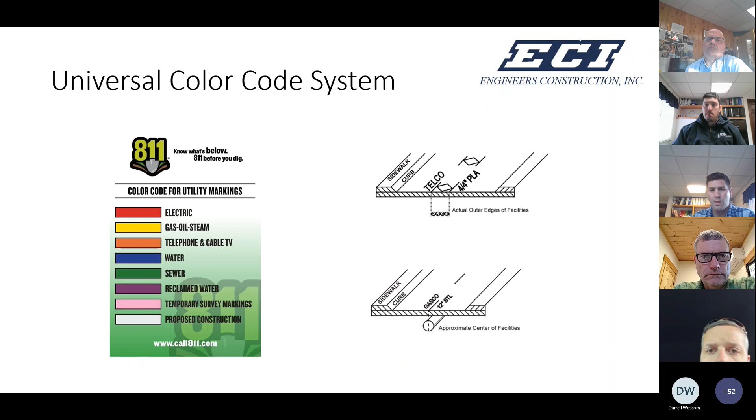Lastly, it's the law for us to maintain our marks, something we sometimes lapse on a bit. So let's make sure that if we're going to remove any marks or pavement, we have a plan. If it's creating offsets with grade stakes, taking photos, but also calling the surveyors to GPS and come back to establish those marks. Once we remove a mark and can't maintain it, we're flying blind, putting ourselves at risk for a utility strike.

Easiest thing to do is grab a tape, create some offsets, put it in your field book, so we can always go back and refresh those marks as the project progresses, especially on long longitudinal projects, waterline projects, with a lot of different crossings. So let's just make sure we have a plan, and that plan is established.

Hey Matt, I got a question. At what point are we not required by law to maintain the marks? What if we've done the excavation, maintained the marks, and we're backfilling but still on the project? Do we have to keep maintaining those marks beyond that point, or is that when we're going to be a problem? What does the law say about maintaining the marks?

For excavation, when we're digging down to do our work, as soon as we're bringing our work back up to finish grade and doing all our hardscape, we don't need to maintain them because we're not going back. But if we're doing a bunch of dig-downs everywhere, we need to maintain those marks. It's our fault if we damage an underground utility, remove the mark, and then say it wasn't marked - it was marked and we didn't maintain it. That's where we get in trouble. It really comes into effect more if we hit something after we've removed the mark. Exactly, that's what I'd say.

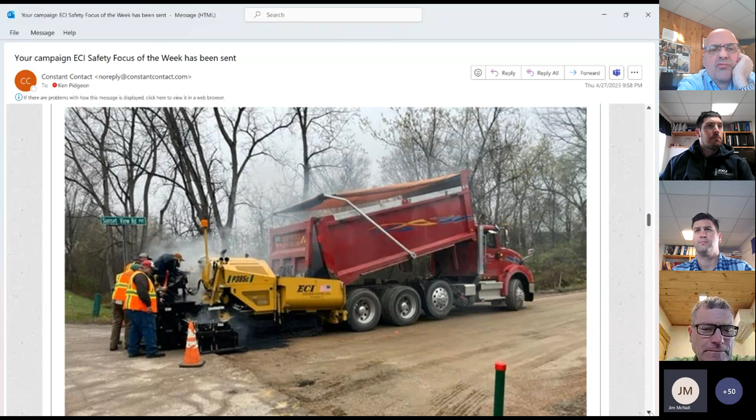Electrically heated screeds. Good, okay, good. Well, that's great.

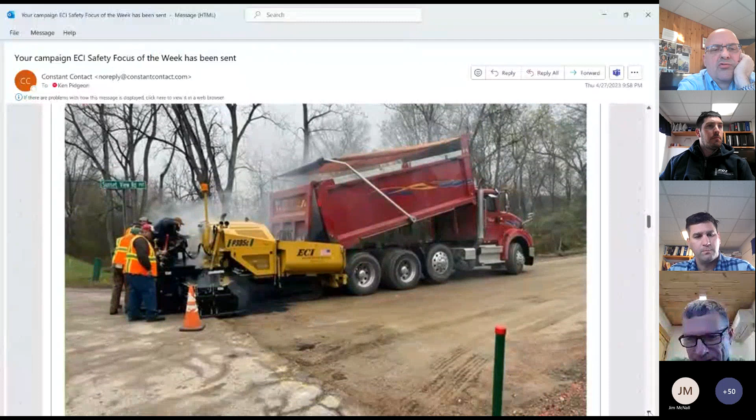And there's a picture from the back end. So that guy on the phone, he's the sales guy. Yeah, Josh, the guy without the vest.

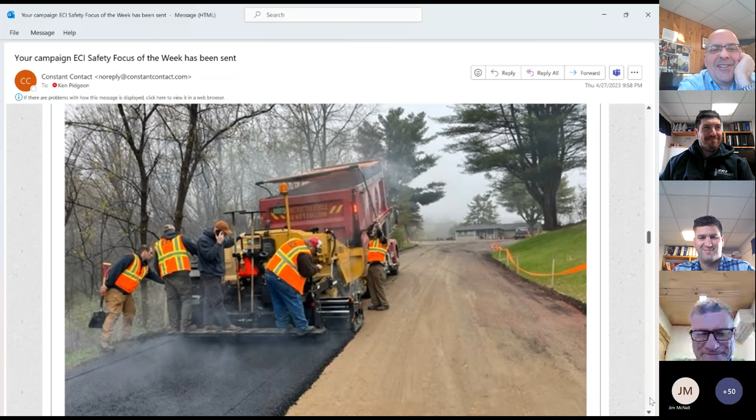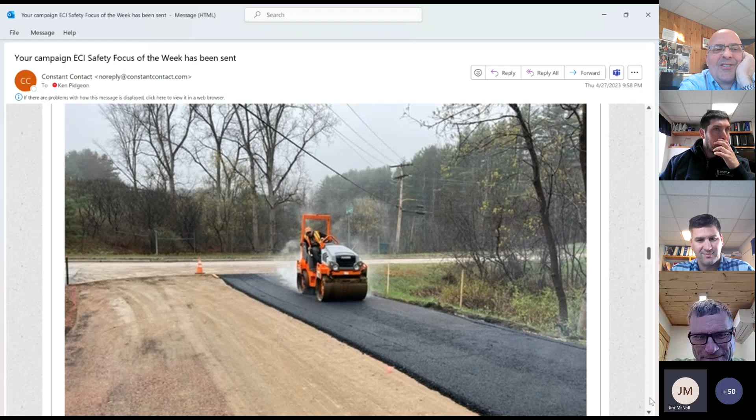It's always awesome running when you get new equipment, isn't it? It's fun. And we had some compaction on that first piece there. Good.

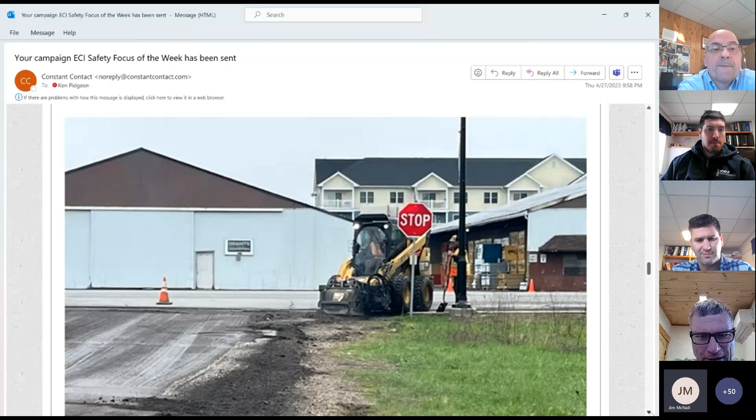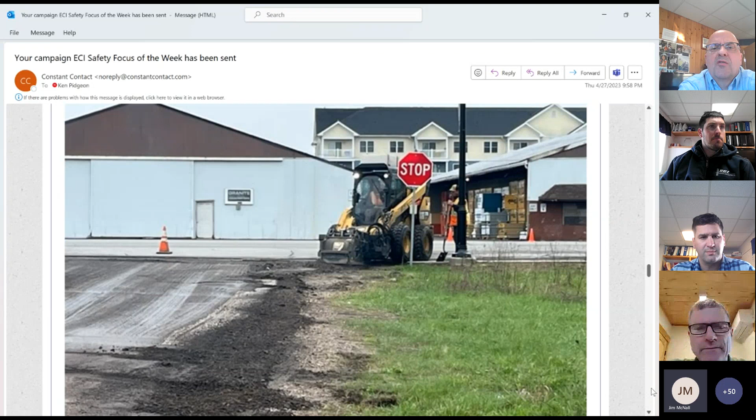Oh, okay, yeah, that's the opposite side of the road, that's Route 7. Haydenberry. McDonald's is right there on the left-hand side. You can't see, okay. Yeah, there you go, McDonald's will be on the right-hand side, I think. Oh wow, heads down in there.

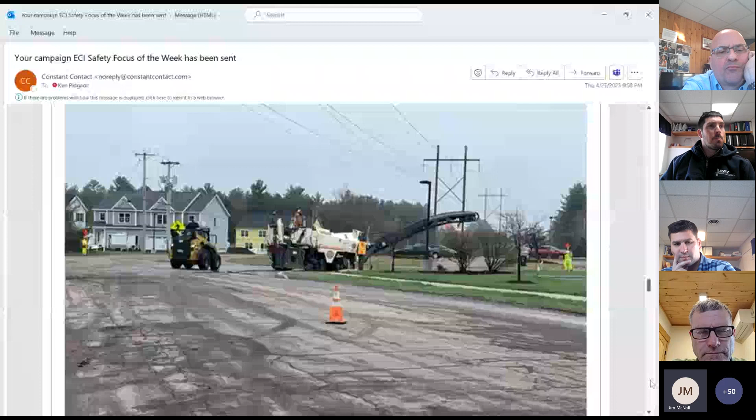That's our skid steer too? Oh yeah, so we were doing, we had some full width. One street was full width, and then a whole bunch of these 25 and 50 foot butt joints or tapers, so they can match into the overlays, not just little trimmer joints. They spec out these 25 and 50-foot tapers, so they're nice smooth transitions.

So we were doing everything, and they're trucking, or? They trucked exactly, they trucked, we did everything else. We did all the milling, trimming, with one truck, and then they subsidized us with additional trucks as needed, pretty much.

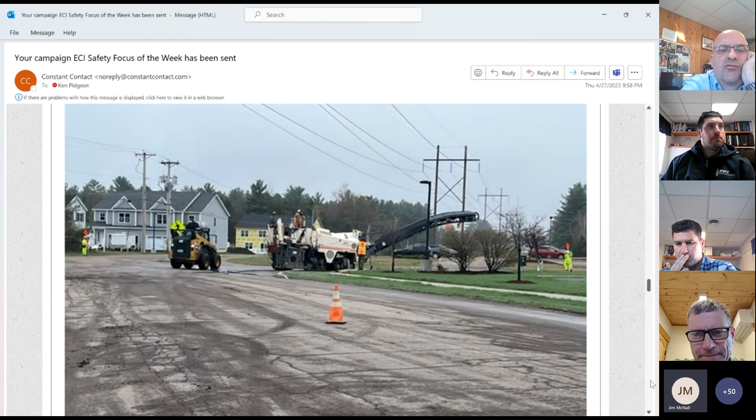Of course, a big part of milling is cleaning it up, right? For sure. Really looks like they need it, they need the pavement. Yeah, look at the existing. Yeah, so you can see like probably a 50-foot butt joint behind them, transition out onto Route 7, so you got a nice smooth finish.

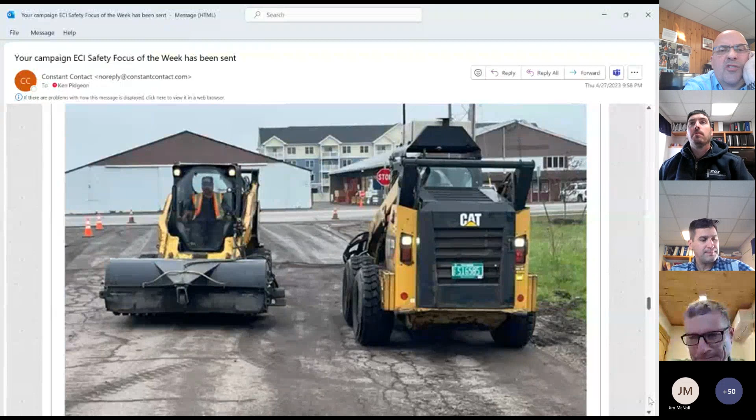These were a little fuzzier, so I kept them small. Who took them up at Lone Pine? That's the little store and check-in building, doing some fine grading prep, getting ready for that base paving that you just showed earlier.

And wrap up that job for the most part, little topsoil, seed, and mulch. The paving guys, the crew, always gets credit for such a nice looking job after it's done, but the prep has a lot to do with it, doesn't it? That is for sure, everybody like Ben and Fix and a lot of the other guys do a lot of the other stuff.

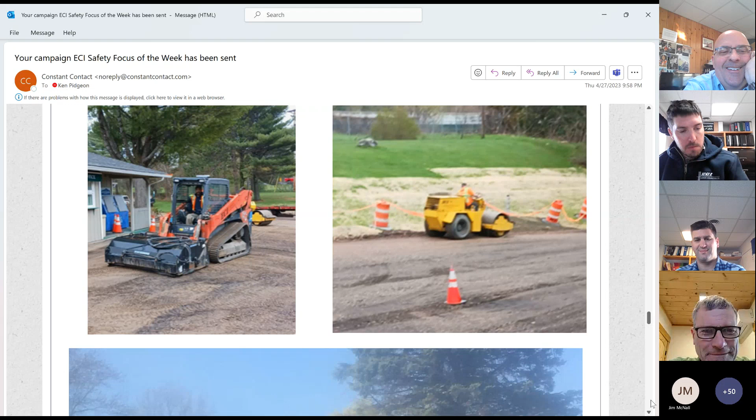It's a little hazy for some reason, but we're putting in that new equipment, asphalt, curb. How old is that roller? The back picture, the old one we call it - I forget the nickname for it. The duo pack roller, the duo pack.

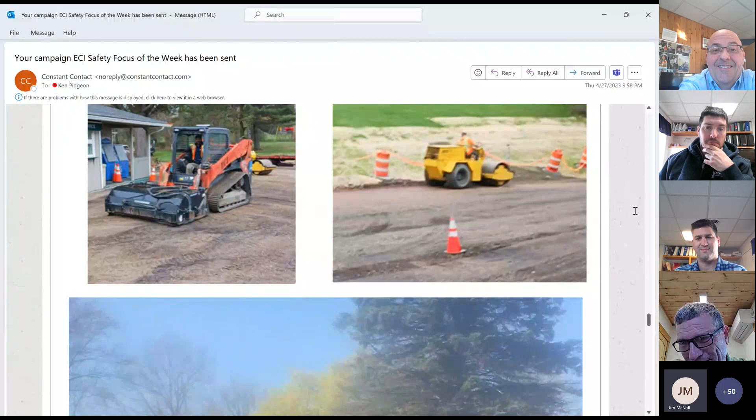That had to be here when you got here. Yeah, I think we have a picture of Ben on that. I'll dig it up next time. Still one of the better rollers - it pounds. It's funny because some of these just self-destruct, but this one's held together.

So the asphalt curbing - yeah, got some curbing going in. And this is the tilt bucket. Yes, they use a whole bunch of - the dump tilt bucket works great for curbing. If you had a little bit of shoulder work to do, you could use it for that. Probably makes a nice wheelbarrow too.

It'll work great for backing up that curb when somebody decides to go over and do it. You can fill the bucket with topsoil or whatever, if it's decent and dry.

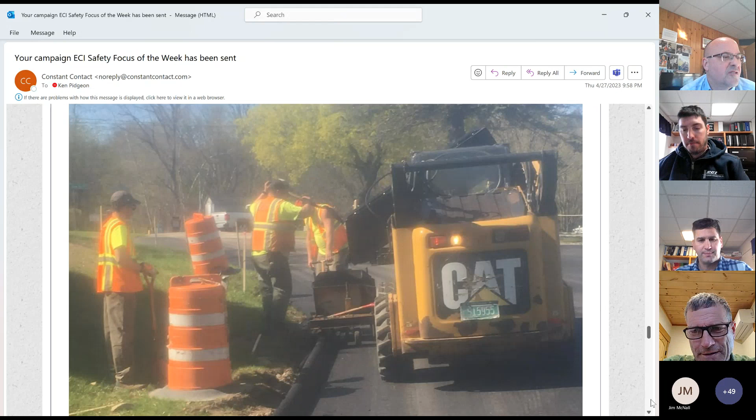Okay, and then this was up on 207. What town is this actually? It's actually in Swanton, right Mark? Just over the line. The Swanton line, when you get off exit - second St. Albans is only about a mile up, 2 miles. You're in Swanton heading towards Highgate. It's called Swanton Street Culvert, and I was like, well does that mean it's not Swanton?

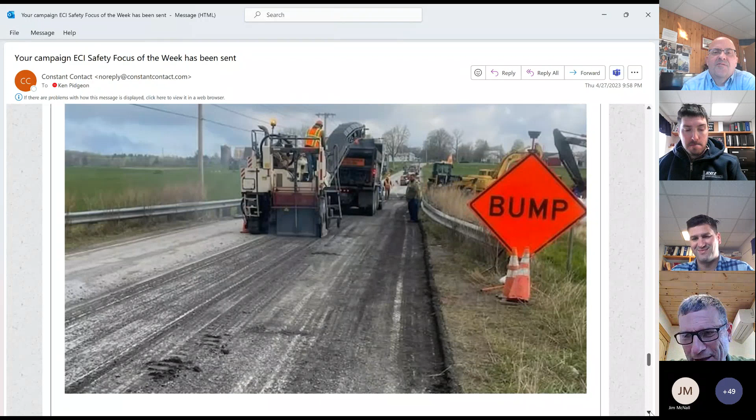So that's coming up this weekend, this job. Closing it right now probably, getting ready to. Closing 207, which is kind of a major throughway. Hopefully everyone cool already knows - probably a lot of our guys coming in on 207 were cursing at our job and turning around and having to go back around 78 or something, they were late.

Tom Lawyer, I know he's in the background listening, but the DuoPactor roller that we were talking about - we have to give credit to Tom Lawyer for that, because when he worked at Woods, he's the salesman that sold us that awesome roller we're still running. So I don't know what year that was, but Tom Lawyer takes credit for selling us that awesome roller. So I don't know if you knew that, Ken.

Well, that kind of brings me back to that 50 years ago time anyway, the DuoPactor and this truck when we started paving in 1973. Before I was into it, I started - I can't remember if I was in high school or what, whether it was a summer or after I got out of high school, I was on the paving crew anyway. So I was the wheelbarrow operator.